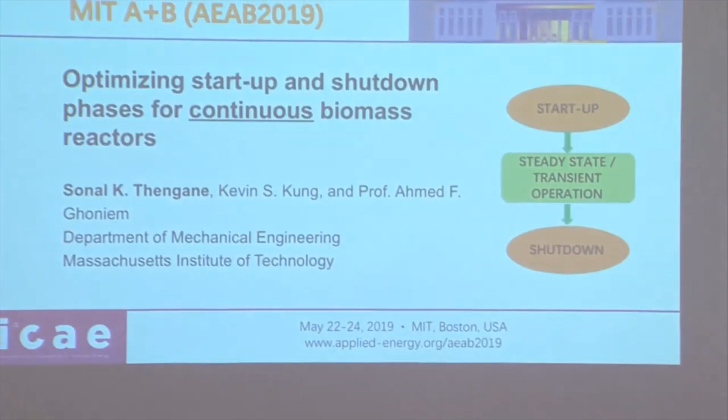Most of the work reported on continuous biomass reactors like gasifiers, pyrolyzers, and torrefactors focuses on the steady state or normal operation of the reactor. Very little attention has been given to startup and shutdown procedures from the research perspective.

These are typical biomass reactors I'm going to focus on, mainly biomass torrefaction, since these are the reactors we work on at MIT in our lab, the Reacting Gas Dynamics Laboratory. We have torrefaction equipment at different scales, from 1 kg per hour to 10 kg per hour. I won't go into details of the torrefaction process, since the talk before mine covered pyrolysis.

Torrefaction is a kind of mild pyrolysis which takes place in the temperature range of 200 to 300 degrees Celsius, in an inert atmosphere or in a slightly oxidative environment.

Our earlier work focused on reaction kinetics, proposing mechanisms for torrefaction, then reactor design, mathematical modeling at particle and reactor scales, and experimental parametric analysis for different biomass feedstocks. We could produce a range of biochars at different operating conditions from both of these reactors.

Today I'll talk about how we characterize the startup and shutdown for these reactors. More or less, the procedure to start up these continuous reactors is similar, and that's why I kept my title quite generic.

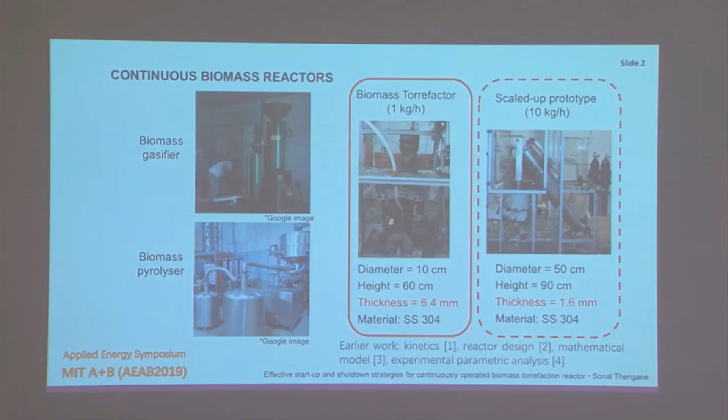It can be applied to a gasifier as well as a pyrolyzer operating in continuous operation. The only difference would be that the temperatures required would be higher, so we'd burn more biomass or have to provide more heat.

The motivation for this study came from my colleague Kevin. He has set up a company taking torrefaction technology to market, and we found that startup and shutdown are among the priority issues of concern for plant operators, because for biomass-based plants it usually takes longer to achieve steady state operation.

Achieving steady state is important to get a consistent quality of torrefied product. Also, if you look at safety incidents, they happen mostly during startup and shutdown, not during normal reactor operation, as per the Center for Chemical Process Safety.

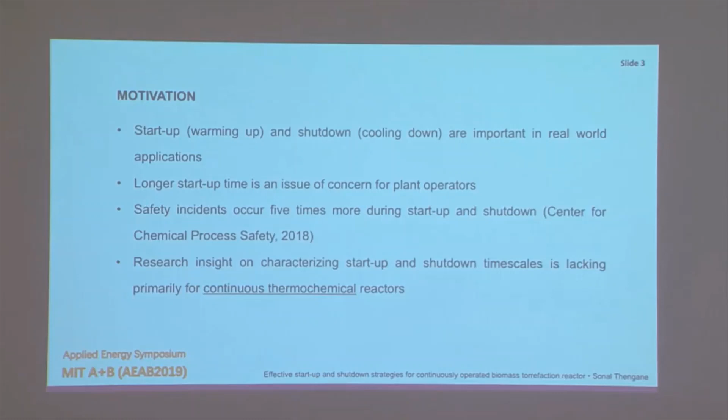So we have to look at it from the research perspective. There are a few reports and studies on batch scale reactors, especially for gasifiers, but for continuous thermochemical reactors it's lacking. Since it's a thermochemical reactor, we need heat, and there are common approaches for providing it.

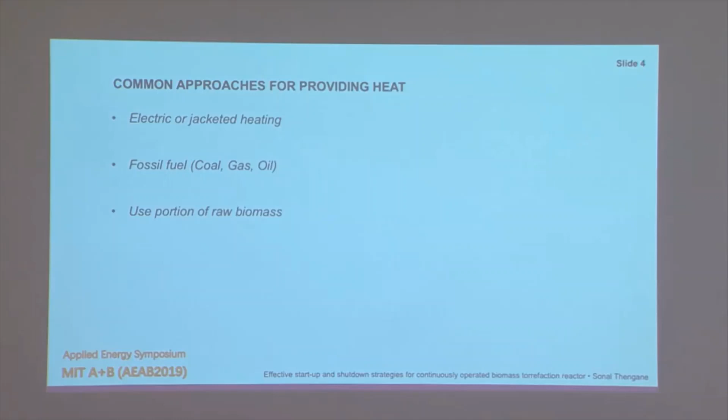Either we can provide heat electrically or through jacketed heating using thermal fluid, by burning fossil fuel like coal, oil, or gas, or by using a portion of raw biomass as feedstock in the reactor, if we're operating in an oxidative medium and not a completely inert one.

For a lab scale reactor, it doesn't really matter how we heat it up. But at commercial scale it does matter, because we want to attain steady state quickly to start our operation.

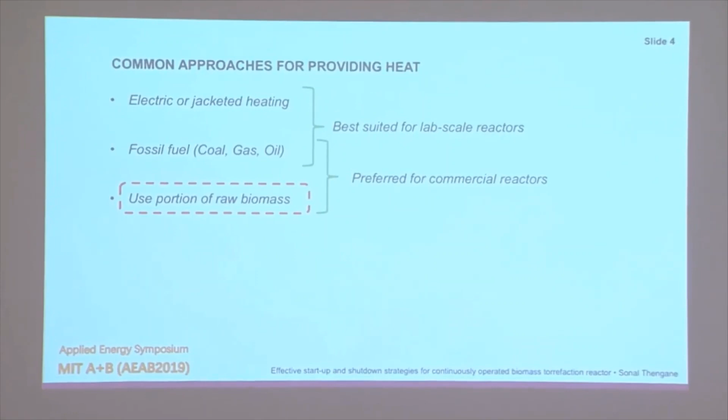But we don't want to lose the renewable and carbon neutrality nature of biomass, so I'll focus mainly on using a portion of raw feedstock within the reactor itself for the startup phase. There are several factors affecting the startup and shutdown timescales of the reactor, like air and biomass ratios, reactor dimensions, insulation, and gas-solid mixing and heat and mass transfer aspects.

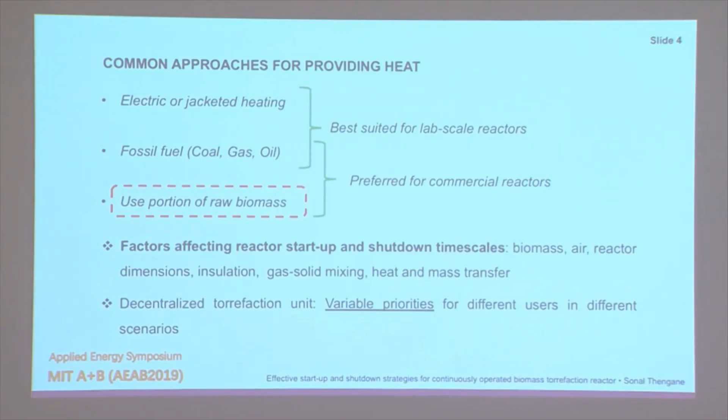When we look at decentralized applications of torrefaction, different users may have different priorities over how they operate the reactor and reach steady state conditions. For startup, someone working with expensive or scarce biomass would prioritize differently than others.

His main objective would be minimizing the amount of biomass consumed during the startup phase—he can afford longer time but should minimize biomass use. Similarly, for someone with cheap or plentiful biomass available, the main objective function would be minimizing total startup time, regardless of how much biomass is spent.

And for shutdown, similarly, based on the condition, it may be a priority to minimize the time for cooling the reactor, or maximize the time for cooling the reactor.

Suppose in a decentralized application, if a torrefaction unit has to be transported from one site to another nearby, we don't want to start from scratch all over again. So if we could maximize the reactor cooling time, we can just start at the next site for the operation.

And for minimizing time, if an operator wants to leave early, he wants to make sure he cools the reactor quickly. Or if a reactor malfunctions and needs to be fixed for a quick repair, we should have a strategy to minimize the time taken for cooling the reactor.

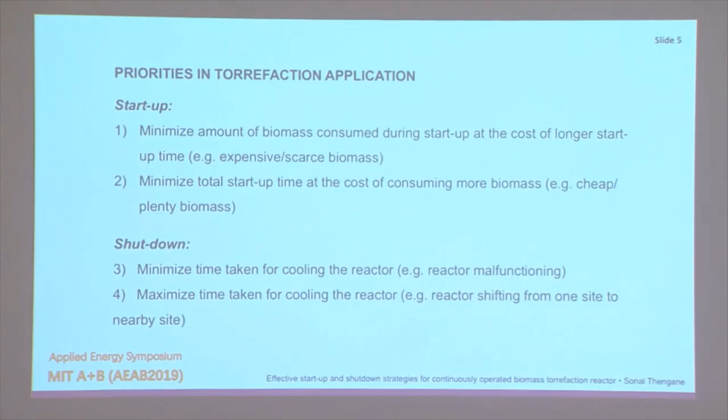So based on these priorities and the earlier concepts I explained, for the same reactor, there may be different strategies that might have to be adopted for starting or shutting down the reactor. And this brings us to the objective of the present work: we want to provide a conceptual framework to analyze and understand these startup and shutdown phases of the reactor.

So we did some experiments on the lab scale reactor, which I showed earlier, for 1 kg per hour, and we are doing some more experiments on the scaled up prototype. And we have developed simple conceptual models based on heat transfer mechanisms, and predicted them for the scaled up versions of the reactor.

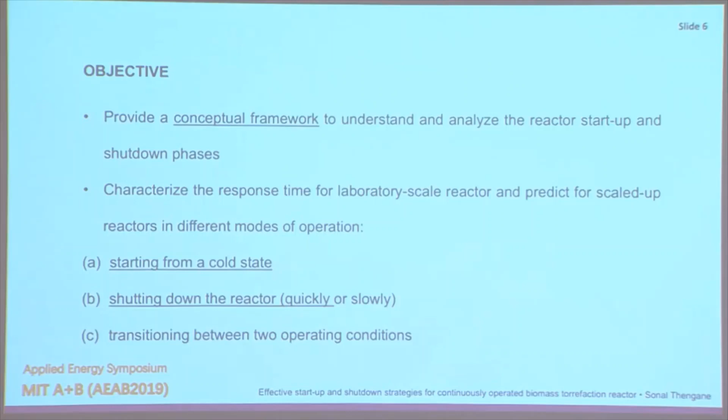So today I will be focusing mainly on starting from cold state and the quick shutdown of the reactor. We also have data for the transitioning between two operating conditions as well as slow cooling down, but in the course of time I'll just cover the first two.

So for the first one, starting the reactor from cold state, we need power for heating the reactor. So we need a measure - how do we give it a measurable quantity? So we call it biomass mass flux, because that would be a fixed quantity for any scale of reactor.

And the strategy is that initially we burn biomass at a stoichiometric combustion ratio, or a little higher than that, to ensure complete burning of biomass and attaining the highest possible temperature, to minimize the startup time.

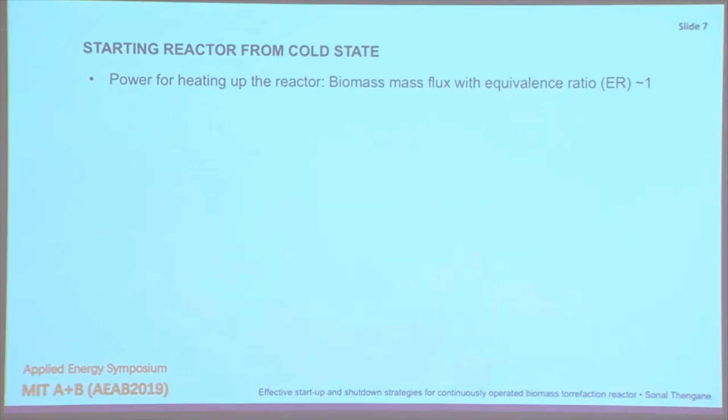So these are the experimental results for a flux of say 4 gram per second per meter square for a 1 kg per hour reactor. Because the reactor wall was very thick, 6.4 mm, it took almost 150-160 minutes for the startup phase, and after that we attained a steady state.

For example, the target temperature was 225. This is the temperature at which we wanted to do torrefaction. Once we attain that, that's when our actual process or laboratory measurements start.

So we start with an equivalence ratio close to 1 or 1.1, but when we attain the steady state, we can switch to the desired equivalence ratio for our experimental conditions.

And if we increase the biomass flux, keeping all other conditions similar, we reduce the startup phase. At this point, when we attain the target temperature of 225, we should have stopped - we should have switched to the desired ER, and we would have gotten a trend similar to the previous one.

But we did not stop the experiment, and we let it run, and we attained a higher steady state temperature, but that depends on the requirement of the experiment. What we can see from here is that if we increase the biomass flux, we can decrease the startup time.

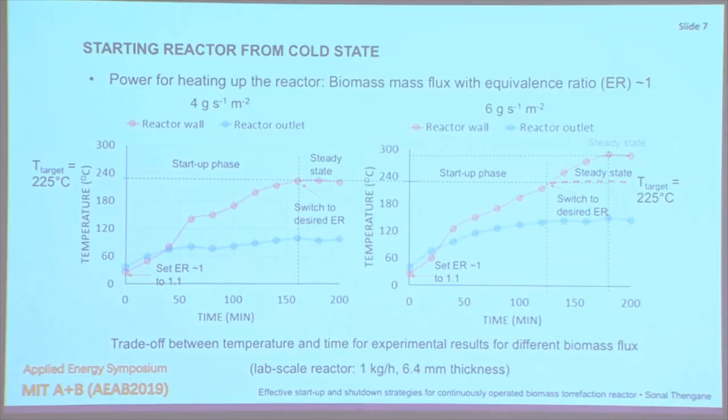But again, I won't comment on whether we are consuming more biomass in this place or less biomass in this place - it's difficult to tell because the total time required is less and the mass flux has gone high. So it depends on other factors also. There was a need to go in more depth about this, and we proposed a conceptual model on this.

What we assumed was that when we initially burn some part of biomass, the lowest portion of the reactor is the hottest part, say at temperature TH. And when flue gases flow through the reactor through the biomass bed, it releases at a cold temperature, say TC. Then there is the wall of the metal and the insulation, and of course the biomass.

So the heat has to flow through all these three resistances.

To analyze the total thermal inertia of the reactor, we need to know the contribution of each of these components. For our lab scale reactor, the smallest one, the contribution from metal was very high, so most of the heat went into heating the metal of the reactor. As the reactor scales up, this percentage is bound to change, but metal still remained the highest contributor.

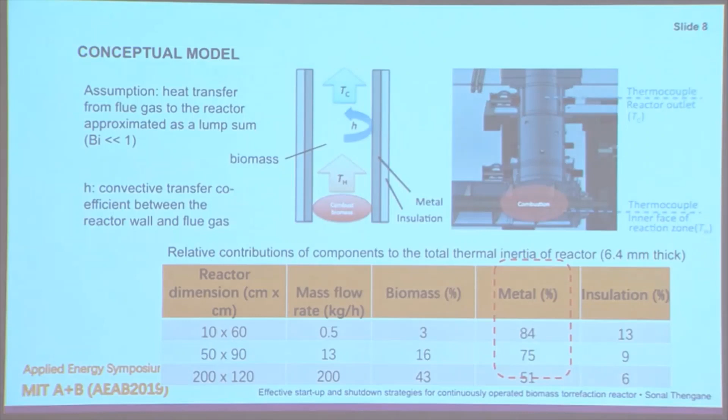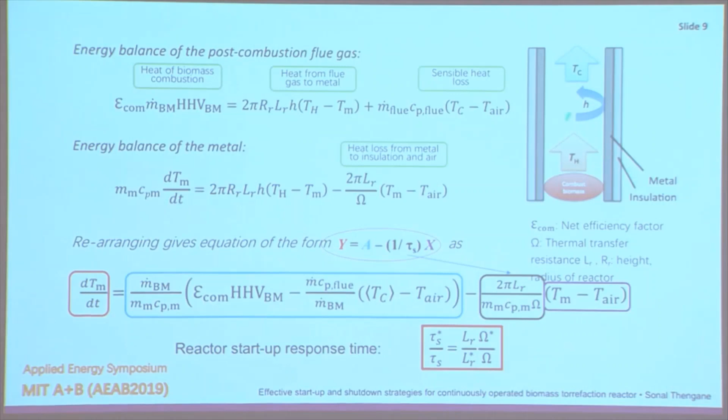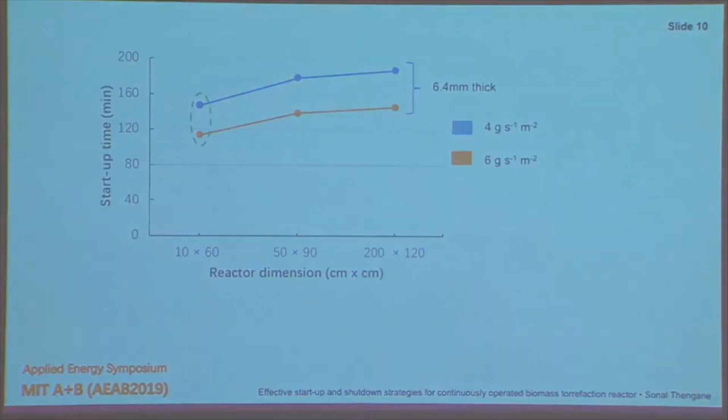So we had some experimental data, and we got some data from these models for 3 different reactor dimensions. As we can see, this was for the thick reactor. As we scale up the reactor, the startup time gradually increases, so scaling up doesn't have much impact on the startup time.

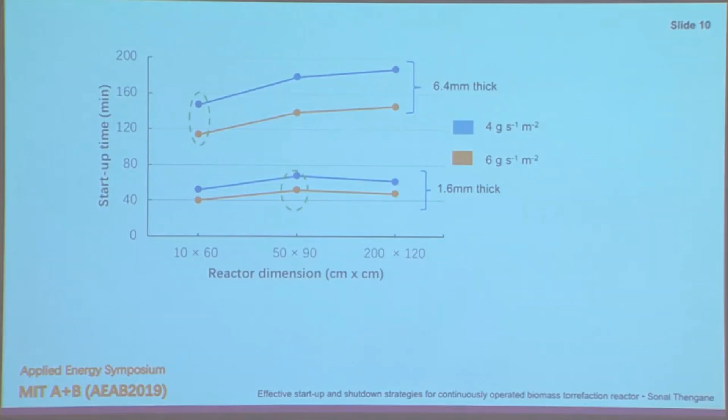But if we increase the biomass flux, we reduce the startup time by some fraction. This is interesting though: when we reduce the thickness of the metal of the reactor to 1.6 mm, we reduce the startup time significantly, by 1/4. The green circles are the experimental results, and the other points are obtained from modeling those equations.

The reason for this is that metal has the highest contribution in that heat transfer process, and as the reactor scales up, the startup time is dependent on the thickness of metal to the second order, and the thickness of the insulation. So from this we get an idea of what kind of metal or insulation we should use to optimize, increase, or decrease this startup time.

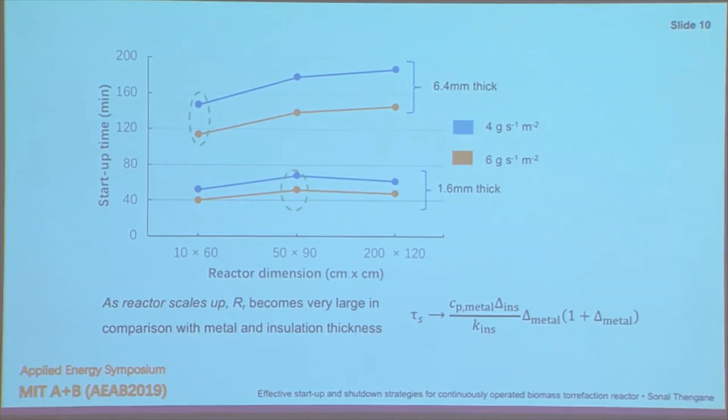Now that we know the startup time required for the reactor, it's important to know how much biomass has been consumed. For that, we defined a factor called biomass consumption fraction: total biomass consumed during startup divided by the mass flow rate, which gives us a value in terms of time.

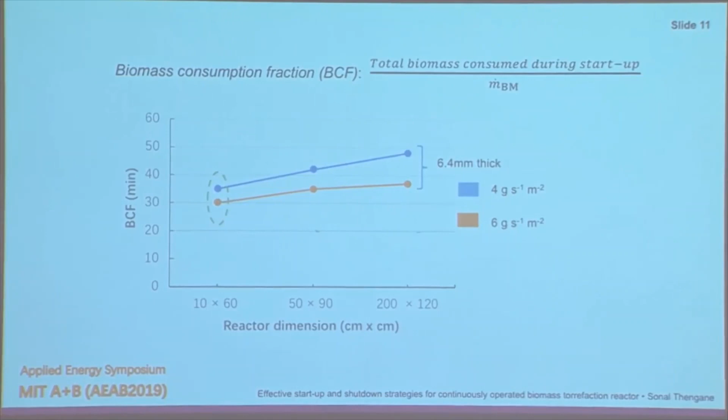For example, in this case, we can say that we consumed biomass worth of 30 minutes of operation. Had we not consumed that biomass in the startup, we would have added 30 minutes to our steady state operation. So this is a measure to understand whether we consumed more or less biomass in the startup relative to the biomass mass flux.

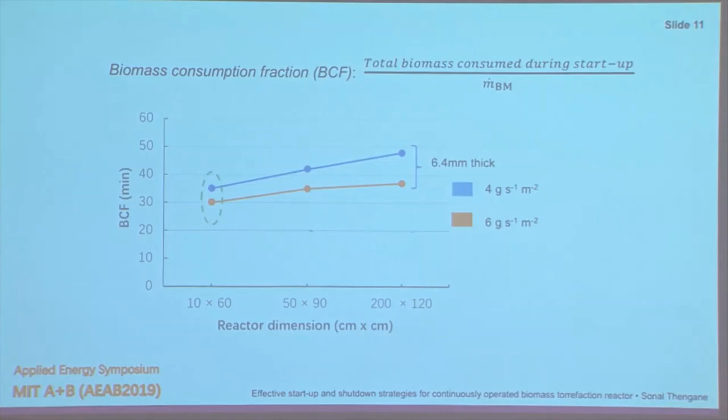That was all about startup. Now for shutdown, I'll touch upon the quick cooling strategy: if you want to cool down the reactor quickly, the simple strategy is to empty the reactor, get all the solid product out, and let air pass through it. This forced convective cooling is the fastest mode to bring the reactor down to room temperature, safe enough to leave it in that state.

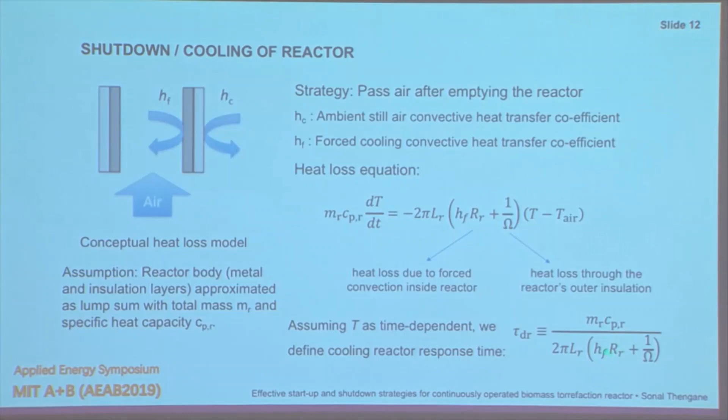When we characterized the cooling response time, it was inversely proportional to the resistance and the scale of the reactor. Since we're talking about forced convective cooling, the relation between reactor cooling time and the velocity of air injected into the reactor after operation is inversely proportional. Under natural convection the temperature drop is slower, but if we force air at some velocity, it's much quicker.

But there's an optimum beyond which we shouldn't spend extra work on the blower to send more air unnecessarily—if we can achieve cooling at 1.9 cm/s, why go for 2.8 centimeter per second? This way we know how much air we should put into the reactor for cooling to ensure it cools down quickly.

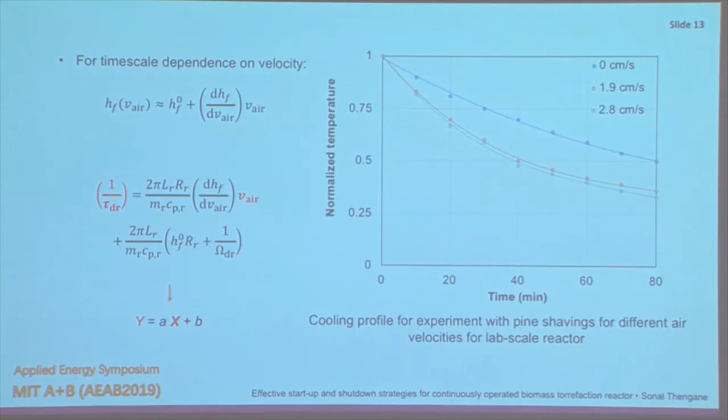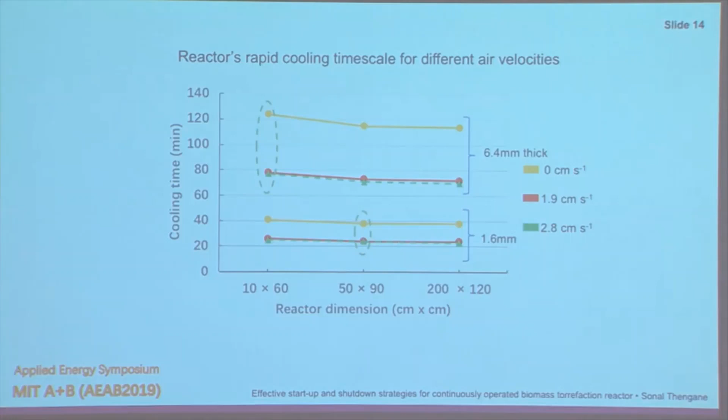These were the experimental and modeling results for different sets of reactors for cooling time. Again, as we scale up the reactor, the cooling time doesn't drop substantially, just a slight drop. But as we increase the air velocity through forced convection, it drops down significantly. And if we reduce the thickness of the reactor, we reduce the cooling time substantially as well.

So to summarize—but before that, let me point out that most of these results are pretty obvious.

It's simple - if we reduce the thickness, if we increase the air, we can get quick start or quick cooling. But I think it can still be looked upon as a research problem and given more concrete basis on theoretical explanation, based on heat and mass transfer models and these transition time scales. For actual operations, people would have different priorities and would have to adopt different strategies to start or shut down the reactor. This conceptual framework would be helpful to analyze what one should do based on the objective of the user.

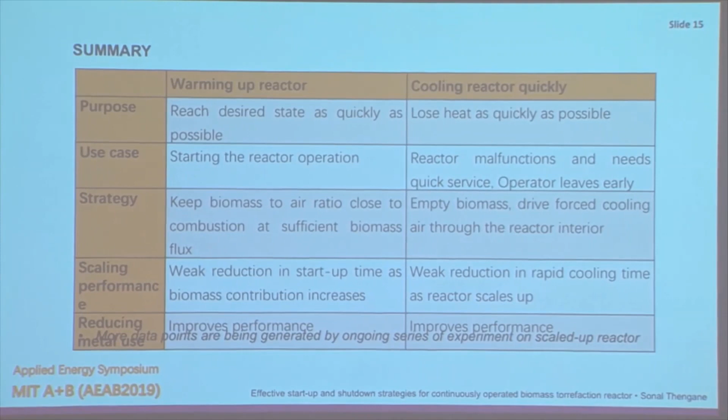We've been doing more experiments at the scaled-up reactor, and our observations are much different from what we got at a small scale reactor of higher thickness, because the losses increase proportionately as we scale up the reactor. The crux of the matter was that thermal inertia should be reduced for the system, in this case through reducing the amount of metal used in the reactor. But there are other factors we should not ignore, like mechanical strength of the structure as we scale up, based on the density of biomass we put into it. Those factors should also be taken into account, and that's what we are doing in our future models.

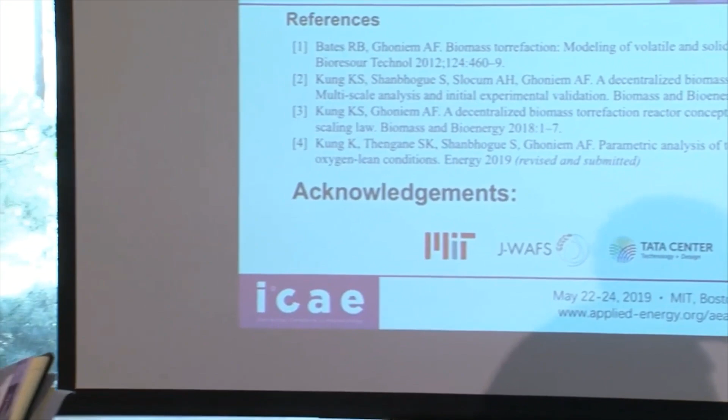Yes, please, Buzz. Earlier in this talk, Lee mentioned that the big factor in cellulosic ethanol plants not achieving the productivity we hoped for was that we hadn't really given enough time to go through the experience curve. How do you think your work could feed into that, to making plants more efficient?

I won't talk about making plants efficient, but I can definitely talk about making product efficiency. If we have biochar, and we don't have consistent quality of biochar, what's the use? If in a bag of biochar a portion is less torrefied and a portion is more torrefied, the carbon contents are different, and it would affect the application. Torrefaction is like a pre-treatment process - we carbonize the biomass, and that biochar could be used for further application. If we've reached steady state operation, so temperature is fixed, pressure is fixed, residence time is fixed, then whatever we feed in, whatever we get is of consistent quality. So we can rely more on the quality of the product and assure that it's of one quality.

So if I was making biocapacitors to go in electric vehicles, for instance, you want to make sure that they all behave the same, yeah. And what you present here is a way to kind of ensure that quality. Yeah, I got it. Okay.